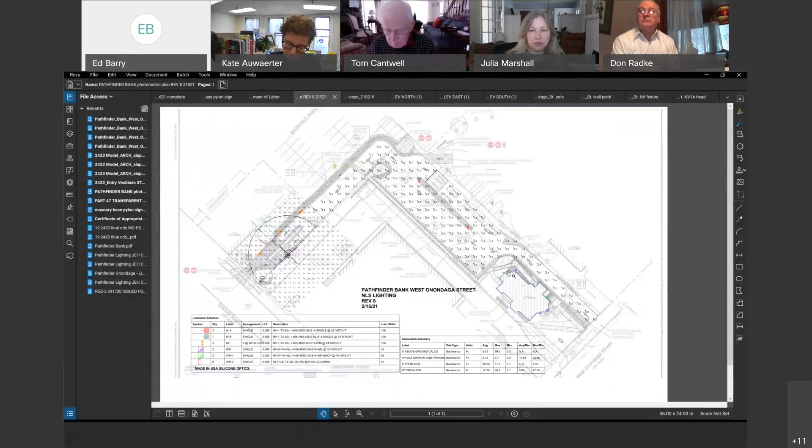Photometric plan. So we sent you a photometric plan, plus we sent what the site lighting fixtures are, the poles and the heads, and we also sent you the fixtures on the building proper. There's 5 locations of that, and then we actually sent some elevations on where the wall packs are going to go on the building. So this is the most recent photometric plan, and it has all the fixtures noted.

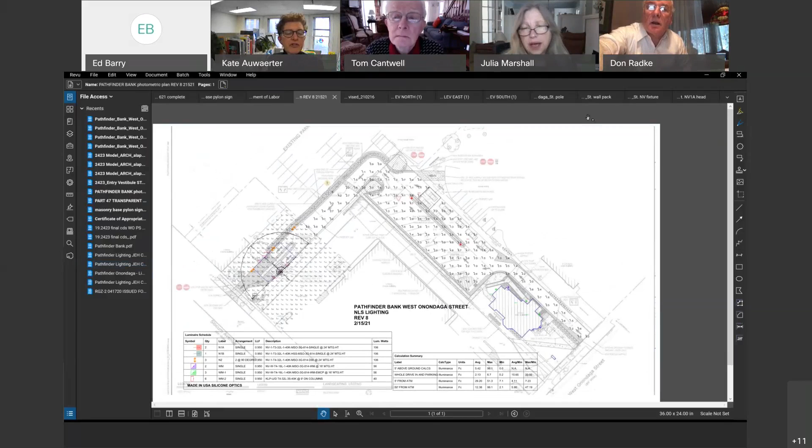I think I might have sent you the canopy lights too. So I don't know if we need to talk more about the photometric plan. I could get into the fixtures if you want, unless you have some comments on the photometric plan. We're good with that? Yeah, I would say - sorry, go ahead, Julia. I was going to say, I think you need to run through it for everybody in terms of what you're showing on the photometric plan so everybody understands the light spread.

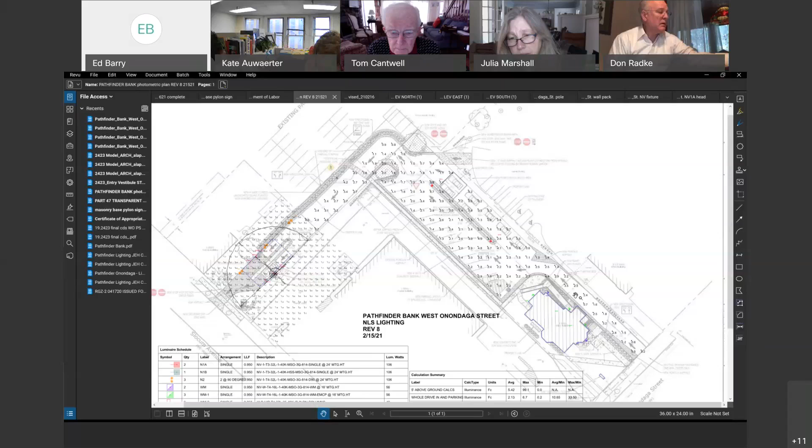Okay, well, the main building is right here as you come in, and so we have wall packs that are being located so that they show main lighting near the stairs and the ramp and all the exits. So it's mainly lit on the north, south, and the east. These are the lumens as you drive down the main. So the poles are located here and here. This is an island where there's a canopy that has the drive-through.

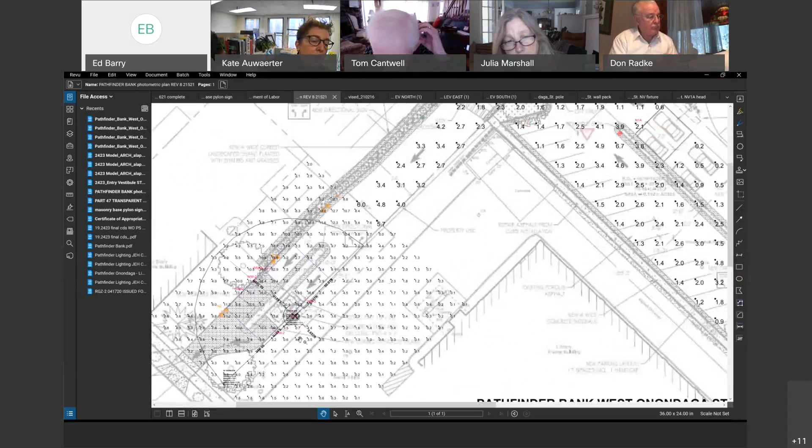So these are the lumens that are indicated. And then there's poles - let's see here. I think there's a couple poles back here where the ATM - this is the ATM. So this is the drive-through for the ATM. So there's 3 poles back here. And this ATM has its own light fixture too, lighting too, which is by code.

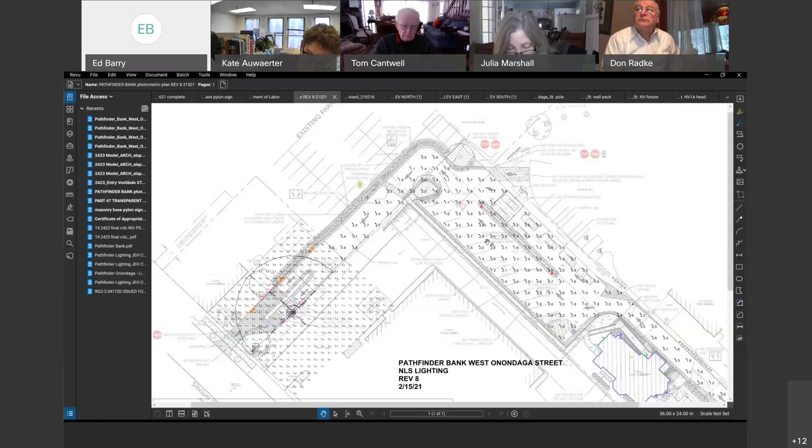All in all, we have 5 wall packs on the building. We have 2 poles, 20 foot high, on this little island over by the ATM - or I'm sorry, by the remote teller canopy. And then we have 3 poles in the back section where the drive-out and the ATM exist. And then these are the lumens that are shown. So you can see like at the edges, they're less, and they're more lit in the middle - you can see these 2.5 and 2.4.

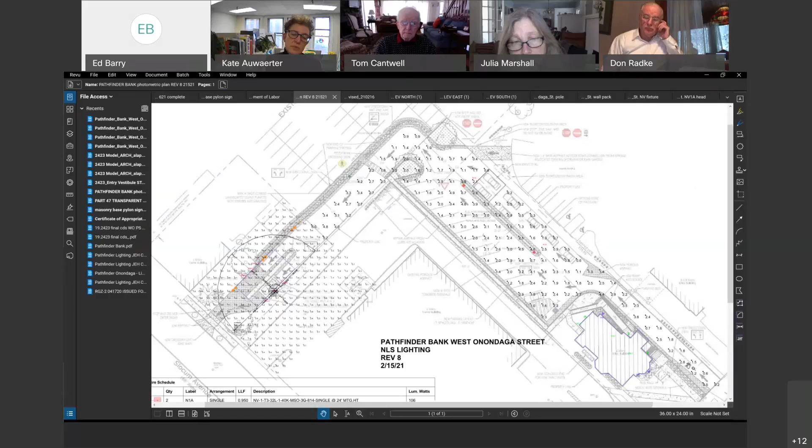This is better lit in the back here because of the ATM requirements. And so the average gets a little brighter towards the building, a little brighter in the middle, and the edges are pretty, a lot less at the neighborhood properties.

Hey Ed, can I add to that a little bit? Of course you can, yep, go ahead Terry. Okay, so I think you forgot to mention that there's the canopy puck lights on there, and I think there was another revision of the lights that had the photometrics of that, and I think that's what was submitted. Right, but still, it was still a minimal amount of light coming off those puck lights. Yeah, there wasn't a lot different change there in those lights. Yeah, and I think the plan that the board has does have those on there. That is the one.

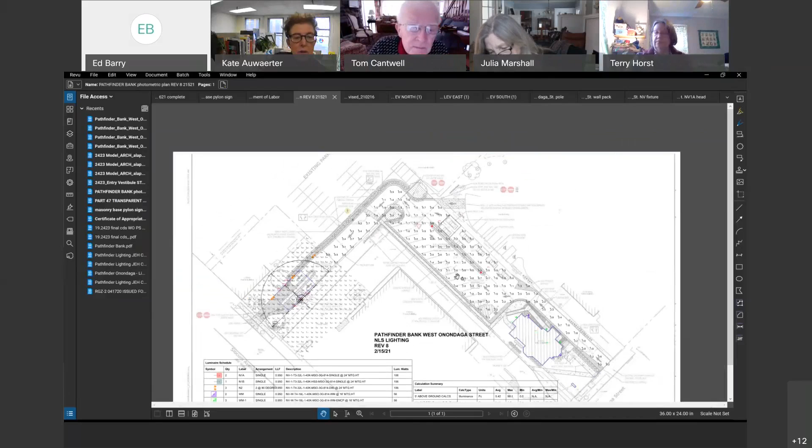Yeah, they're actually up-down lights, and we only had one in each pole, just to illuminate the canopy itself. So that's basically the overall lighting plan. I apologize if I didn't put the most recent one up here. It hasn't changed a lot, Ed.

metal finishes that you get, the bronze and the light bronze and all those. If we think we need a color, we could probably get a Kynar finish color, but we have not gotten to that detail yet. No, actually where I was going is not a color, but probably an aluminum, either bronze or, depending on whether it's a dark bronze, medium bronze.

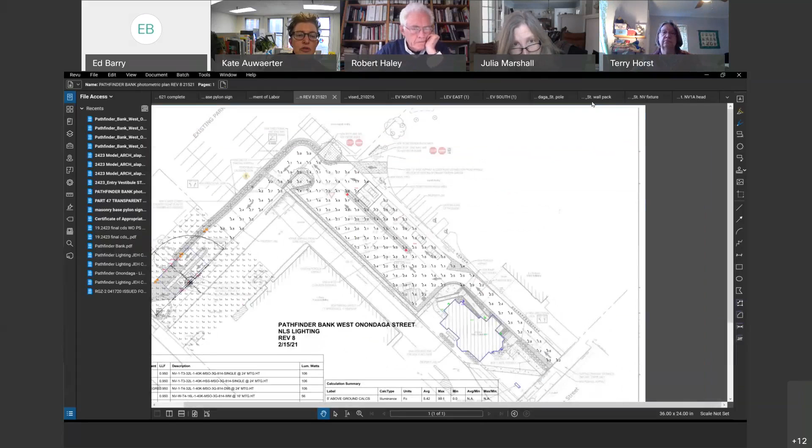I don't know, Kate, we need to see that, maybe if they provide you with a sample. Sure. Here's the wall pack. Can you see this now on the screen? Yes. Okay, so that's the unit we're getting in.

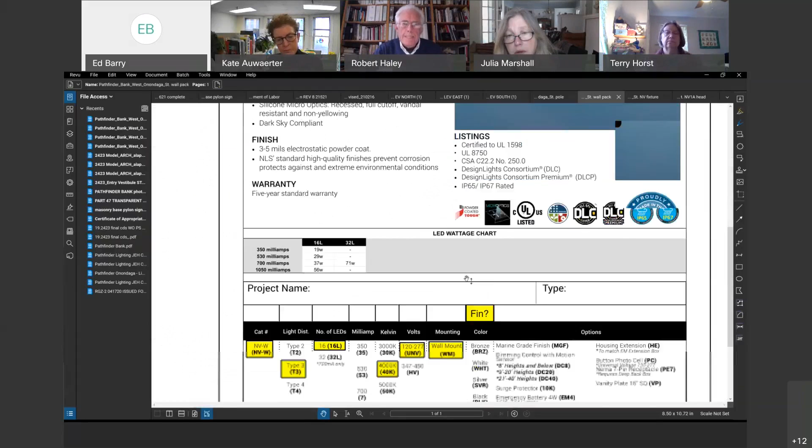That's the unit on the building. I thought the unit on the building was the smaller one, the K-lip, cut off wall pack. No, the K1. I'm sorry, the K1. Do I even have that? The K1 goes on the canopy. That's the canopy, the K1.

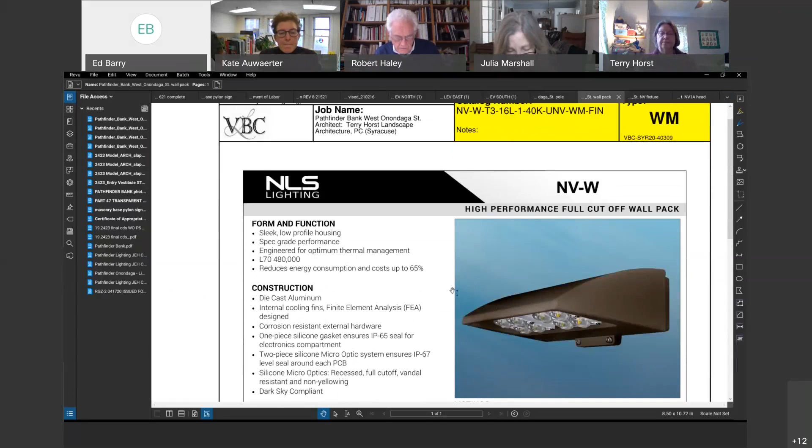Okay, right, that's the up-down one on the canopy. And these ones are the ones that will be going on the building. Exactly. Okay, so yeah, at some point we will have to pick it, we just haven't gotten there yet.

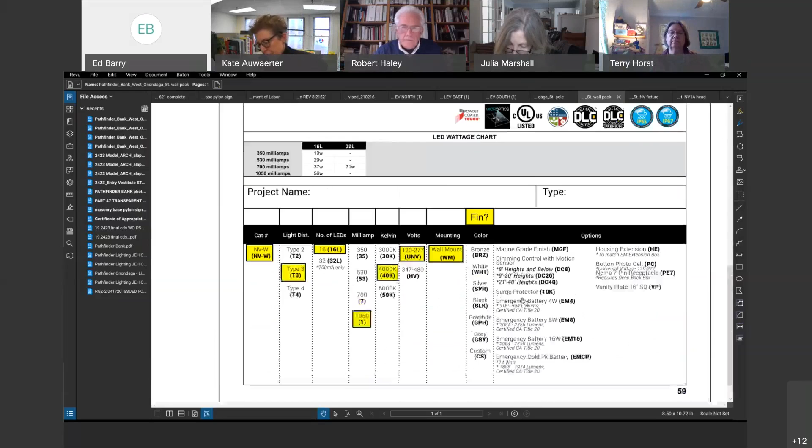If the board has a recommendation, go ahead and make the recommendation, as we know it's sort of a light tan color. What brick does the board think of? Blonde. What's on the screen?

Well, I would just comment that the board might recommend a dark bronze for fixtures, although we would leave it open to your judgment as a final application. Is that a fair statement from the board? In terms of the finish, I'm hearing a couple people say dark bronze seems to be just the color of the natural dark bronze metal finish.

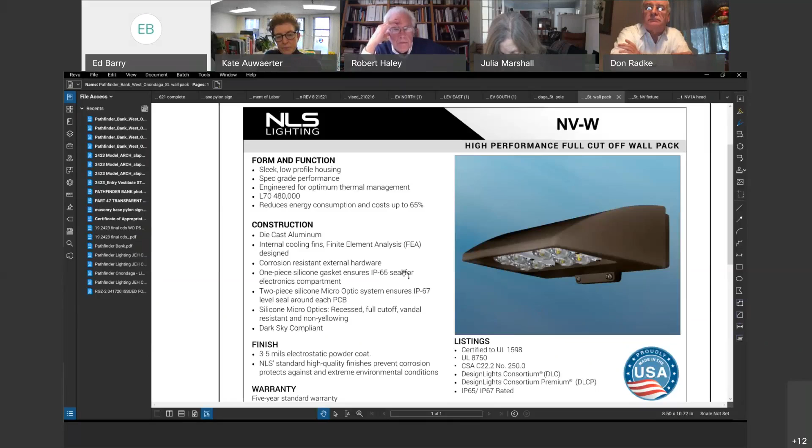I have no problem with dark bronze. That's probably appropriate for that area. Yeah, plus it won't stand out, it'll blend in. Their choices are bronze, white, silver, black, graphite, and gray, and I think bronze probably is the best choice if it's a light brick.

Usually a darker color subdues the object of the fixture against a historic building, so a dark color would be preferred. Dark bronze is probably the most typical, but it's your choice.

Another couple more questions, if I could. Your plan for the fixtures on the building, you said 5, and I see 2 on the plan, and the elevations don't have the light packs where they're shown on the plan. So is the plan incorrect at 2 wall packs, or am I missing something? I see 3 maybe, let me see if I can.

Well, I guess just as I look at the plan, the wall packs are kind of all over the plan. Are you looking at the photometric plan, or which plan were you referring to? It's the photometric plan. It's a little inaccurate because that was done before we really looked at it

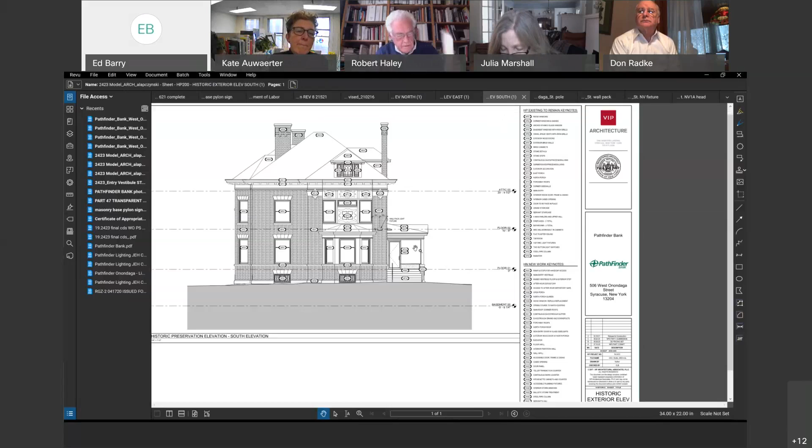as far as trying to get it nailed down to the exact locations. So if we revert to, let's look at the elevations instead, I think even better. So right now I have the south elevation. We took a look at it height-wise, and where it has an optimum, close to optimum light, and tried to put it so that it works with the building too. So we put it around 14 feet off grade, and here's the first one, looking from the street at the building.

We got one on this corner here, and as you walk up the stairs, there's one on the other side, which would be the east elevation. So for the east elevation, we have 3 - one on this corner, one over here, and one here, and we split them between the floor windows. This is to illuminate the walkway, the stairs up, and the ramp.

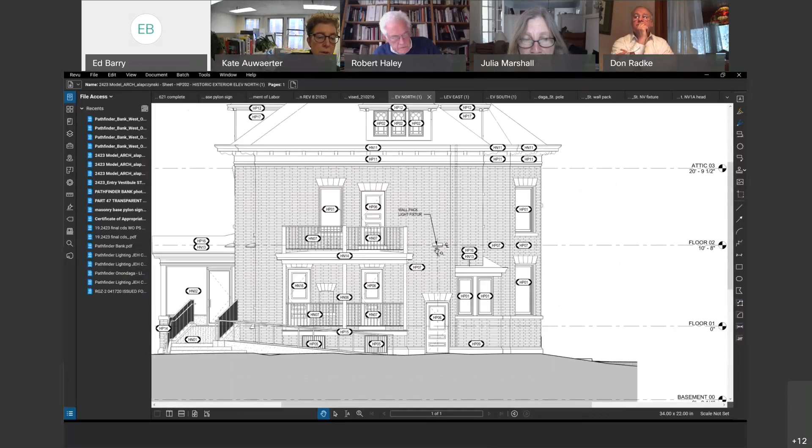And then on the north elevation, we also put one over the back door, at the same height. So we try to keep them uniform in height, and we tried to find a place that was consistent. So that's how we located it now. We took some time looking at it.

Is there anything on the west elevation? Wait, I want to finish my question. Did you address it exactly? I had looked at the elevations and found, I think, 5 fixtures, and I didn't see that on the plan, so I just wanted to make sure.

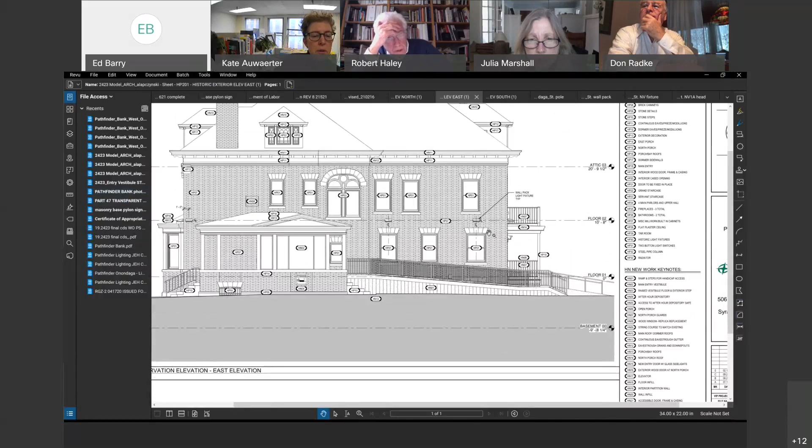Secondly, my recommendation is that you might drop the datum or the height of that to align with the roof edge, down about 1 foot. What I'm suggesting is that if you line them all down with the roof edge around the building, it accepts one of the datums of the historic porches as the height for all the light packs.

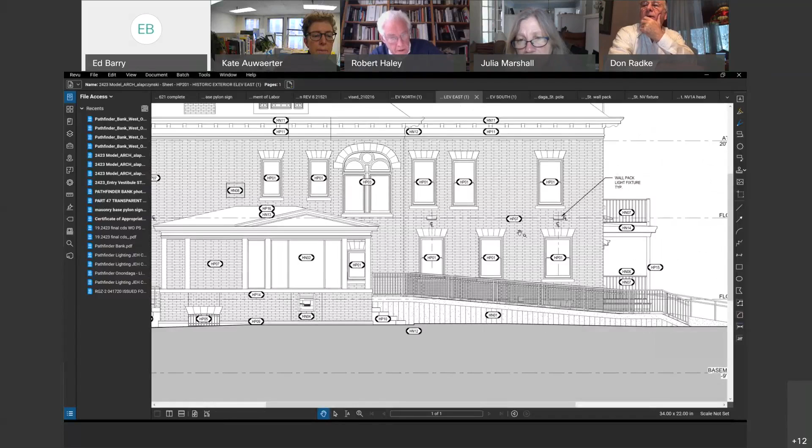Well, we did look at that. The problem is it starts to get into the stonework if you put it in this location. No, it's not, it's top of stonework, but I appreciate your point. I think you're fine here, but that's a slight articulation - if it's possible, please consider that. Well, I guess you wouldn't want it on the stone.

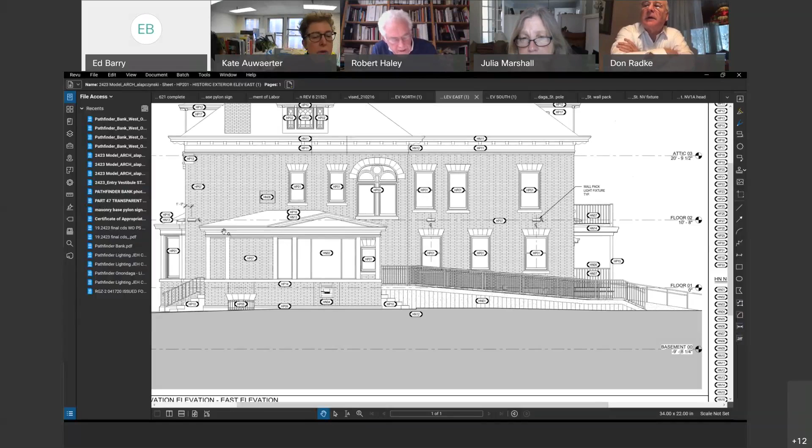No, no, we could drop it lower. Well, the roof line, I don't believe, is in line with the stone if you take the exact measurement. Yeah, it's close. I've looked at it. So we could, I mean, we could.

I'm not telling you what to do, I'm asking you to be sensitive. That's fine, just take a look at it, lower it to the point that you think is feasible, and that'll be fine. Do you have any light packs on the west elevation?

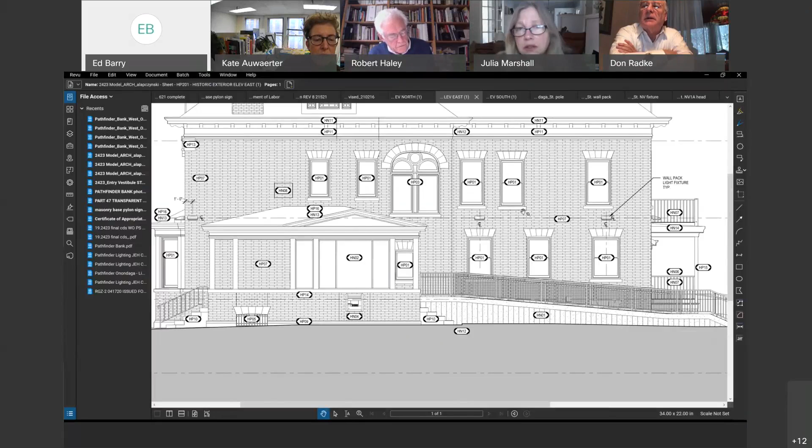No, we don't. May I just say - I agree with Bob, the only reason it looks a little odd is because it's equidistant from the upper sill and the keystone, so if you just bring it down a little bit, not necessarily aligning with that eave, I think it would help.

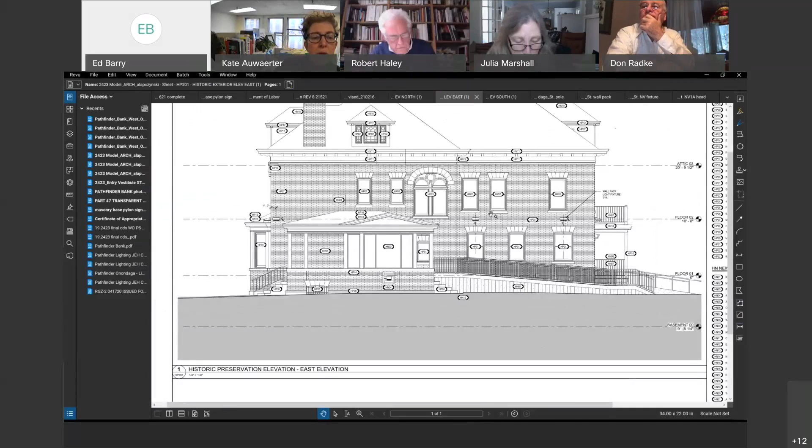But I'll leave it to you. I'm just going to ask, and maybe it's rhetorical, are the packs drawn to size on the elevation? Just because there's nothing written. Yes, and they look fine actually, we took them off the web, and they're as close as we could get it.

Yeah, one of the things that's so difficult with these light packs is that one of them, like on that front elevation, the south elevation, that light is so close to the bay window that it's going to blow out the light on the bay window. So you're trying to locate these items to not accentuate in a negative way the building.

And it's a delicate balance. I appreciate what you've done here, I'm not speaking against it. I think it's just slightly further articulation - if you could consider it, that's all.

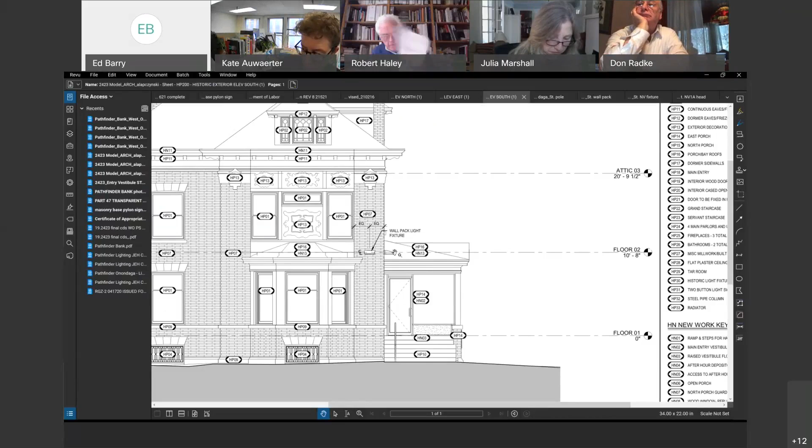Yeah, we actually did look at it like that, and if we lowered it here a little bit, we were kind of running out of space. So we were looking at that with that in mind, and we'll look at it again. Thank you, okay, sounds good.

Want to go on to the changes? I didn't see the sign on the lighting plan - is that sign on your lighting plan up close to the sidewalk? Let's wait on the sign, Bob. Let's go in a different order.

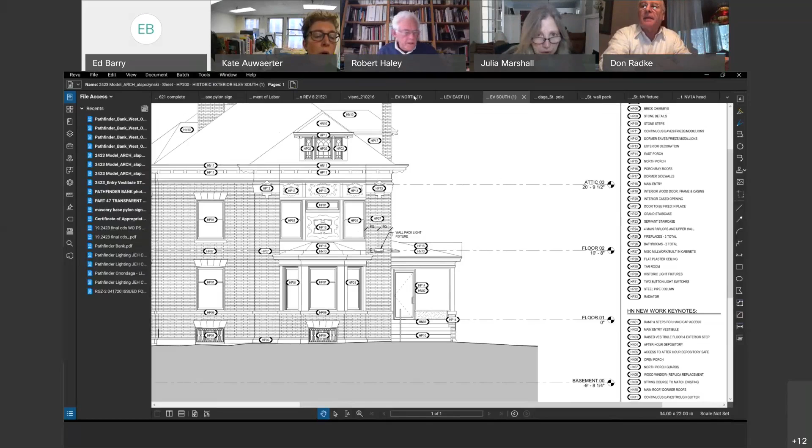Let's go ahead with the changes that you made, I believe, to the west elevation, or was that the north elevation, and the glass work? The east elevation. Okay, one second, I gotta find that. You mean the porch, or the entry glazing enclosure, the entryway? Right, yep, right.

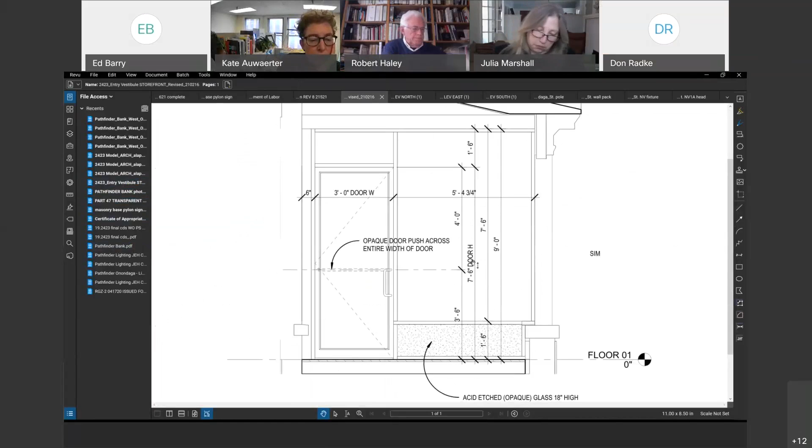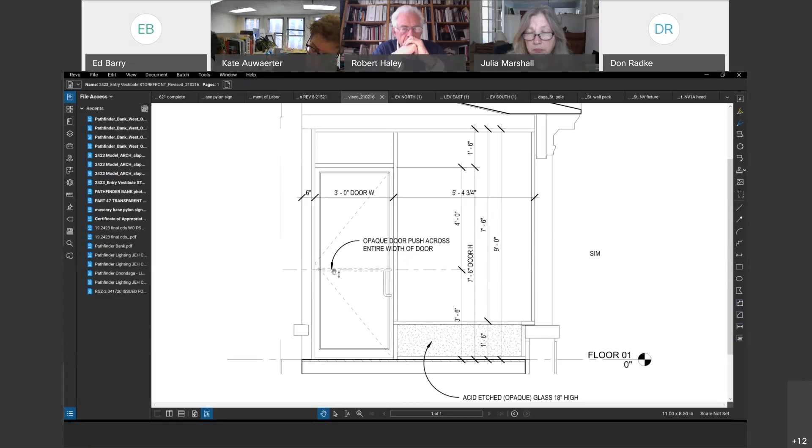Okay, so this is what we did in response to having the glass be all glass. We looked at the code and tried very carefully to keep as much glass as we could. So we decided we would take the horizontal aluminum frame across and put an opaque etched glass at the panel here, and then for the door itself we're going to have a push bar, and we feel that meets the intent of the code. So this is how we're responding to meeting the code for the glass, while trying to still keep the historic fabric intact. We hope everyone would agree to that.

Any questions on that? I think it's the right response. Did the code require 1.6? I'm just curious. I have the code, I don't know if I want to get into it. That's okay, as long as you're complying, that's fine. Yeah, we are in compliance with the square footage of it.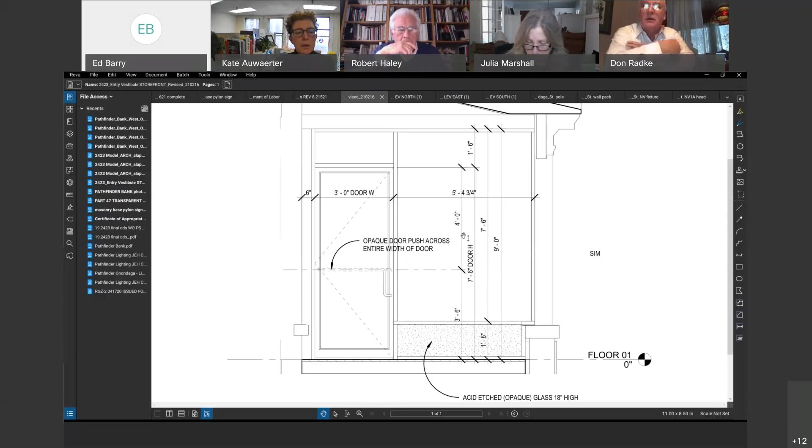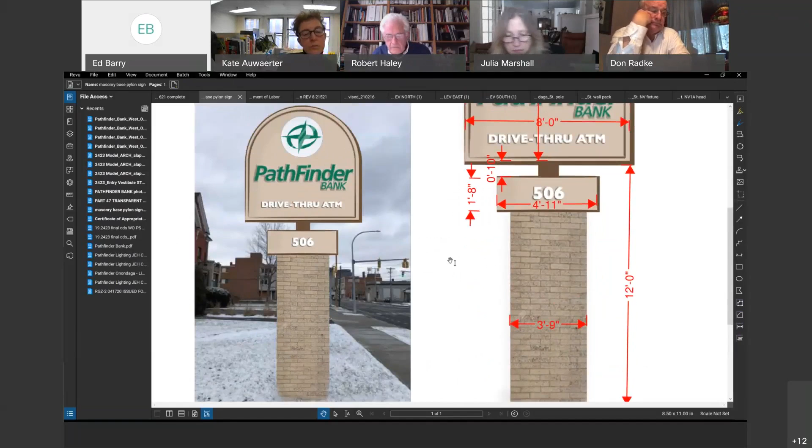Okay, let's move on to the sign. So this is the sign that we would propose we would want to go with. I know there was a comment or two for it and a comment or two for the pole itself, but talking with Pathfinder and a lot of us, we believe this is the way we'd like to move forward with, and this is where we're at right now.

And this is what we'd like to get approved. Okay, what's the lighting on the sign? It's a lit sign inside, interior light. So what lights up on the sign, the lettering or the background? Well, I'm not exactly sure how they light the inside of it, I could get you more information. We haven't gotten to the design internals yet, we just know it's a double-sided lit sign.

Are both the upper and lower portions of the sign lit? Yes. So the street number is lit as well as the Pathfinder name? That's correct, at least that's what we're proposing. Any comments on the sign?

Ed, the only comment I had is the overall height is 18 feet, and in that location that seems high. I don't know what other board members feel. I don't know if I can get to it, but there's a Walgreens right next to it, and across the street there are some very large signs right next to us.

We know that, yeah, I don't think we're even close to some of the heights of our adjoining neighbors. It's actually taller than that. If the bottom is 12 feet plus 8, so it's 20 feet total. Yeah, it's 20 feet total, we could take that into account.

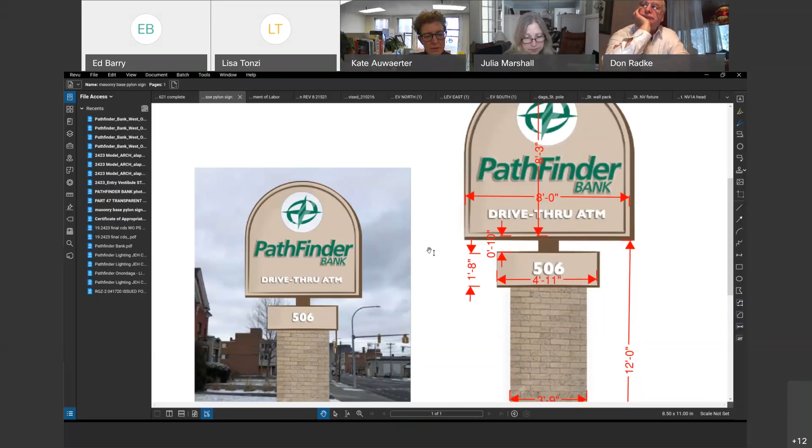Well, I know the historic people don't want you to try to go historic as far as matching a certain style. As far as doing an old style type to try to make it look like it was on the building originally, we want you to do something that doesn't react to that. It wants to be that you can tell it's not historic.

Who is that? Can someone else chime in on that? I'm not sure I understand what he's saying. They don't want to mimic because they want the historic building to stand on its own.

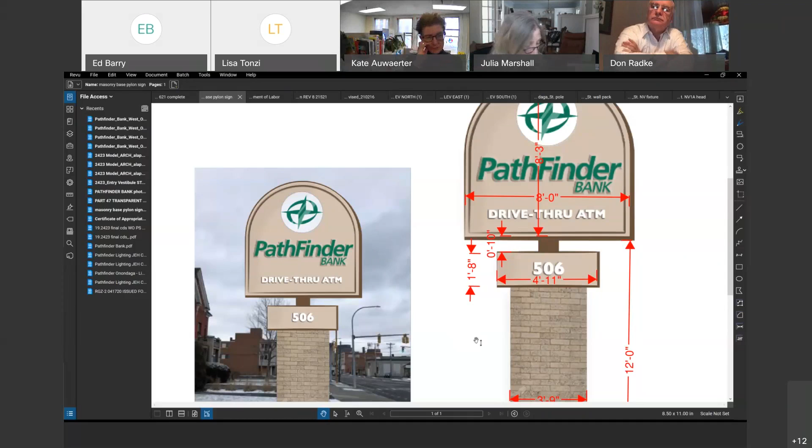But as far as the sign is concerned, it's not pedestrian friendly, and since it's going to be lit on both sides, I think it's uncomfortably large. I think a simpler sign would be more appropriate. I'm uncomfortable with the shape of it and the scale of it.

Let's get some other comments from board members, please. Thank you for listening to some comments from the previous meeting where we have more of a vertical orientation.

I appreciate that, but if we could scale this back like a quarter or a third of its size, I think we'd start to see what Julia is saying about more pedestrian scale, pedestrian friendly opportunity here, because we have quite a large column of brick and signage.

And if we reduced it 25, 30%, I think we start to reach our pedestrian scale, and it would look more in tune with the residential structure that this is sitting in front of. Even though it's a commercial building now, it's a residential piece of architecture, so I think that's getting lost in the translation here.

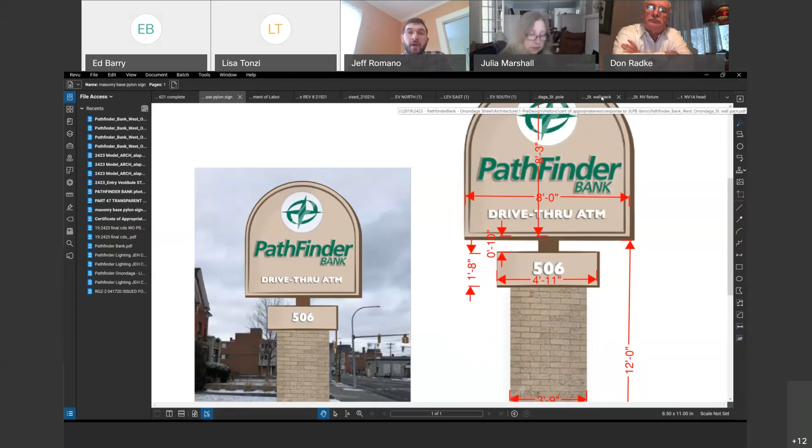But I do appreciate the vertical orientation of the sign, and I'm venturing my guess that the brick would replicate what's on the building. Ed, if you can clarify that.

We will have to take into account the texture and the tone of the brick, and we'll probably try to do something close to it. Yes.

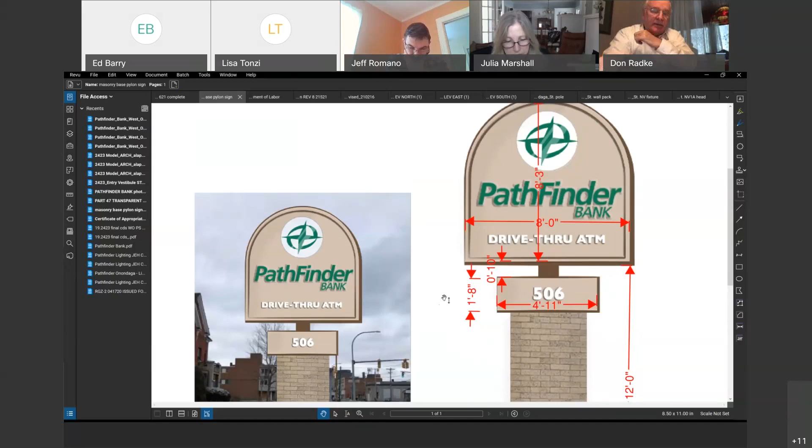Thank you. And if you could go back to your client and talk about the scale of the sign, both the height and the actual size of the sign itself, the 8x8 sign. The comments seem to be pretty across the board to see what we can do about reducing the overall size and scale.

Okay, get back to your client then. I don't think that's an issue. I'm sure we could work with that, and maybe reduce the width of the masonry too.

So we'll take a look at it and we'll scale it back. And I'll talk to Jim. I don't know if Jim's online with us right now today or not. Jim Dowd.

I don't see him. Okay, I will talk to Jim. We'll take these comments into account and we'll send a revised something out unofficially back to you at some point.

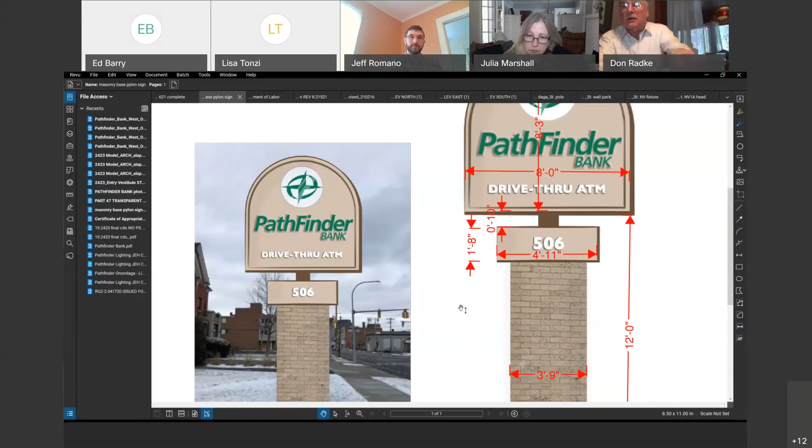Terrific. If I could just jump in, I think we should establish that the maximum height for the bottom of the Pathfinder sign should be 8 feet. In this kind of a location, I don't see any reason to be any higher than 8 feet. That would be above vehicle height.

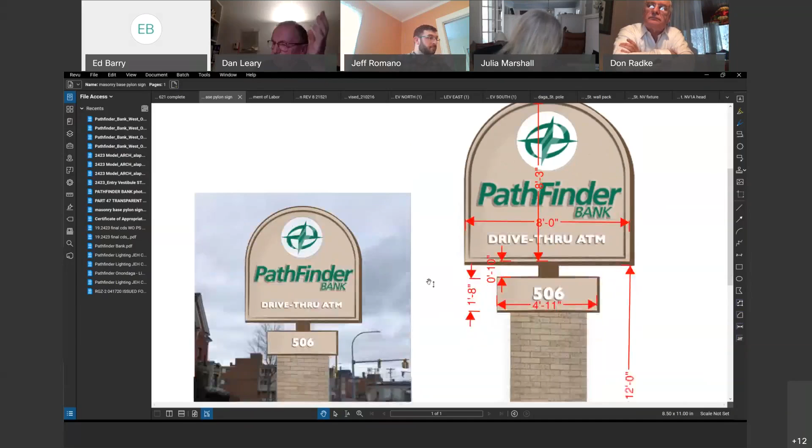I question the need for the cap on the top of the brick wall with the illuminated 506. The 506 might be larger numbers, but I don't see any reason to illuminate them. Other than that, I agree with the rest of the comments.

Okay, so add that to your list. Well, we were using the existing pole that's there. It's 12 foot high. Otherwise we'd have to modify the pole, which I guess we could, but that was why we started with 12 feet. That's an existing pole structure that's sitting there now.

Right, and we were just going to utilize the sign pole that we have. Okay, well that's why you should take a look back at it again, and get back to us with the comments.

And I echo what Jeff said, so much for listening to the comments and at least going in directions that we can all live with. So that's very good.

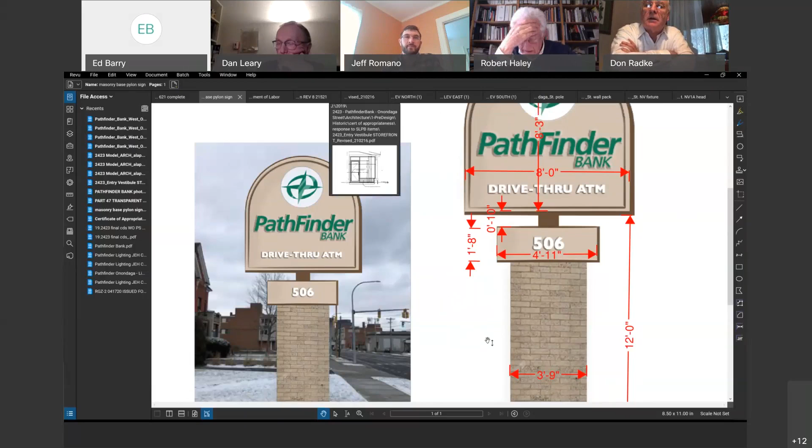Mr. Chairman, any other questions? Yes, I have another question, if I could ask it. Sure, go ahead. Very simply, I wonder, Ed and Terry, if you could outline for us what are the existing signage requirements in that area for this sign?

150 square foot is our building, our site we have right now. Terry might know the overall, but I know that she did the numbers, and we're well within our 150 square foot.

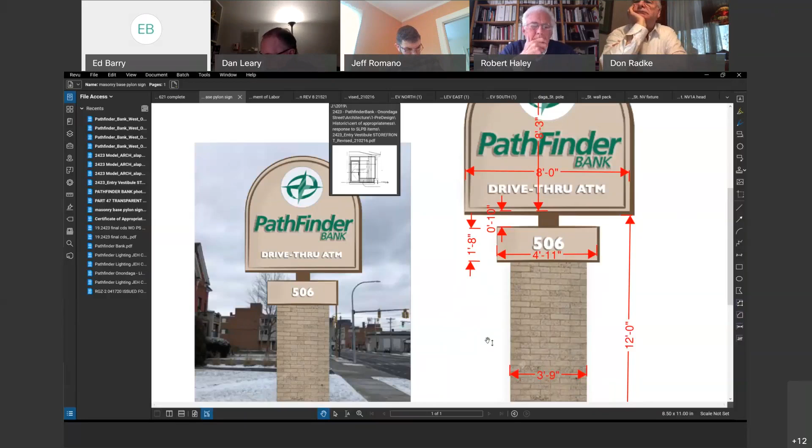What about the size and location requirements for signage along the street here? Terry, maybe you could talk about that. I'd have to go back, I don't know off the top of my head. What I'm trying to say is that we do have some standards in place.

If it is 150 square feet, your 8 by 8 is more than that. That's 64, times 2, that's 128. I don't know if they're going to count the lit address.

My point here is that the overall condition of signage, we need to know what the basis is to judge this one from, in terms of variances, either location or material. I agree, I hate to go down the line and try to make this submission appropriate by little tweaks. I'd rather know what the requirements are for the building's signage and then have you respond to that.

I think we're not looking to compete with other buildings commercially, and I know your bank would be. Appreciate that from your client. The comments were quite simple, oversight.

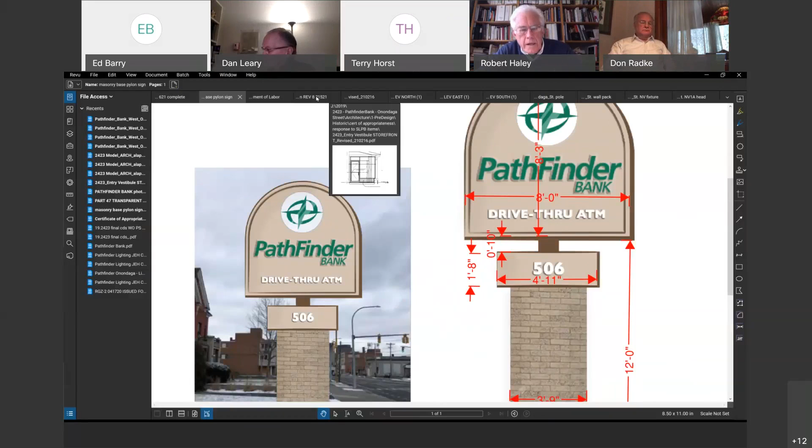First of all, it's a completely new submission. I appreciate now your earlier submissions of simplicity, both in size and in the simplicity of the sign. I think the comment was made about the scale.

This is 12 feet high, that's 2 6-foot people. So it's definitely a road sign as opposed to a pedestrian scale sign, which is a negative on this street. I think all of that comes to bear that this is a classic case of commercial signage that we're trying to get right for the historic context, both of the street and of the building.

So I would like to know first the requirements for signage, so that we know what variances might be needed here, then we're trying to judge it in context to the building's scale. In addition, the question of the logo on the drive-through teller canopy.

I don't know if it's part of the signage. Exactly, in fact, the whole teller canopy is a sign in itself, as you know, the arcing form, the signage on both sides. And I presume there'll be some signage over on the exit teller as well, so that's all part of your total signage submission here.

The sign's big, it's enormous. It doesn't have a design aesthetic to the building, except for the brick, which now I'm becoming more in favor of. But simplicity, your client's name, certainly the critical identification of the street number.

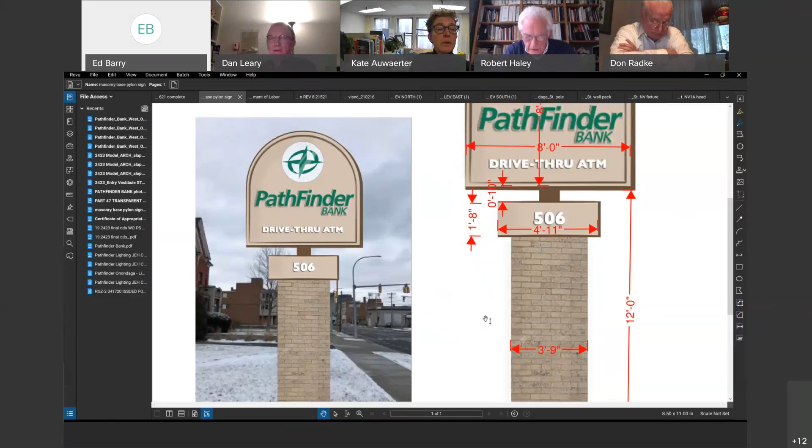The only comment on the vestibule is that the changes on the vestibule are really quite excellent. I'm glad that you, Ed, and your architectural team here were supported by this board to do what Albany was asking you to do there. The new detail of the raised 18-inch base aligning with the existing stone cap is a very appropriate detail both for code and for this building's design.

I think what's remaining here, only Kate, to answer your questions, is the detail of that metal vestibule engaging the columns. That's not shown in these documents. In other words, a plan showing how the vestibule walls, those 3 glass walls, are built to the stone cap, the existing stone cap of that wall.

Yeah, you lost me. The detail is going to just wrap around it. We don't have a particular blow-up detail, so to speak, at least at this point. Let me ask you a question then.

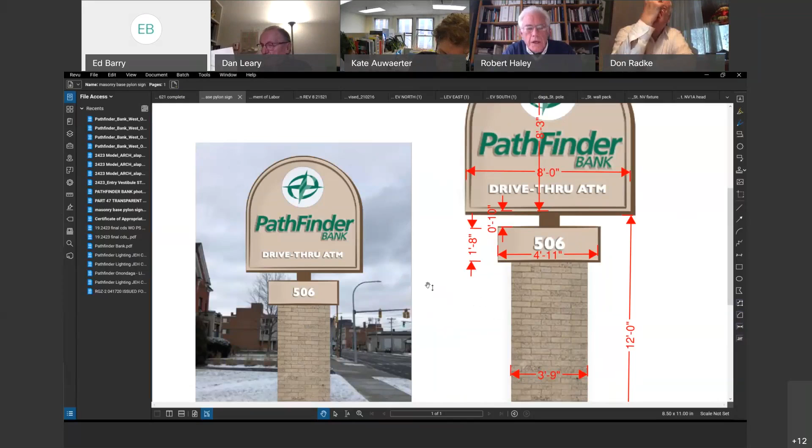The glass wall, the eastern glass wall, where is its location relative to the stone cap? I'm talking about the plan here. Where is the glass in plan? Is it out with the face of the column, or is it back at the inside? I'd have to get to the plan, I don't have that memorized.

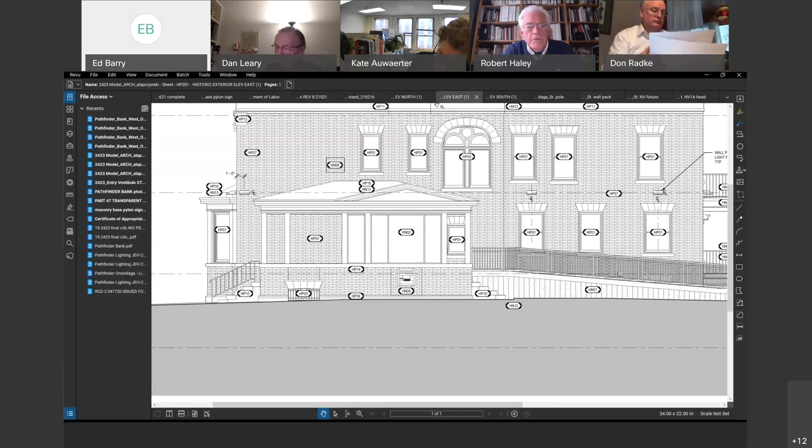No, that's okay. My point is that the company was pushing you in one direction, and your instincts were right, which is to make the vestibule a subset inside the brick wall base and the colonnade. So it's critical where that eastern glass wall is relative to those columns, in terms of rendering that concept clearly and historically accurate.

Yeah, we'll definitely take that into account, and I'll look at it in the floor plan myself, just to make sure we're okay with it. It was on the historical plan, I believe, like that.

Okay, I understand all your comments on the sign, and I'll get back to Pathfinder. I think the first thing we'll do is look at the overall size, and reducing it by 20-25% might solve most of the problems with the amount of signage we can have and the scale. Maybe we take the 506 address and put it in the body of the sign. We'll take a look at it.

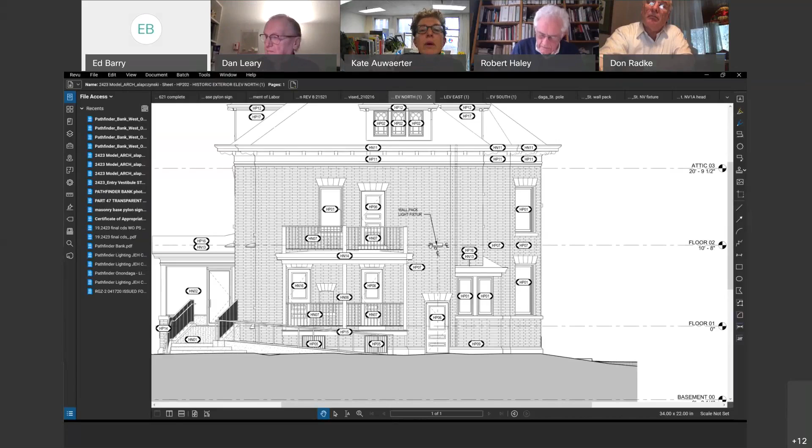Okay, that sounds good. And yes, I think we should also note, Don, that the lighting plan does not include the wall packs, as far as I can see, in the foot candle projections. It's not really critical anywhere except around the front entrance and the stairways. It would be inadequate the way it's shown, but I think if you added the wall packs, it's okay.

Yeah, if you could identify those on your scheme, as you said it wasn't 100% accurate. If you could update that. I think the only thing that wasn't accurate was the canopy fixtures. I believe it shows the wall packs on the lighting plan. Let me go find it here.

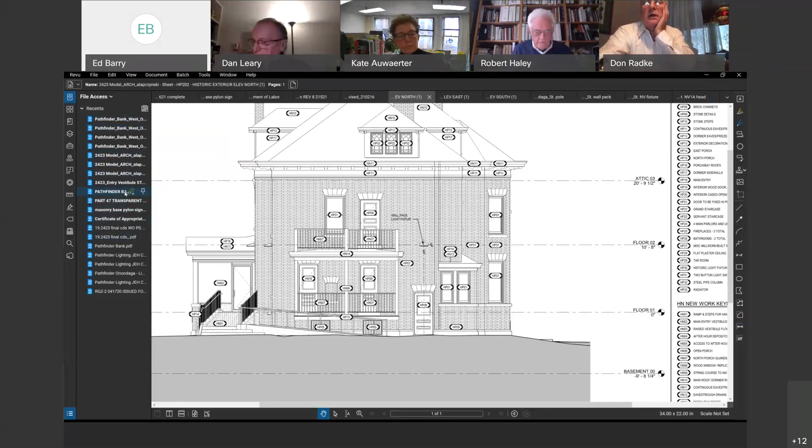Well, the foot candle registrations are not. Yeah, they're right here - wall pack, wall pack, wall pack. They're just not exactly shown in the location. We changed it; this was done before we started to look at the elevation of it, and it really doesn't affect the illumination, but we can have it modified exactly.

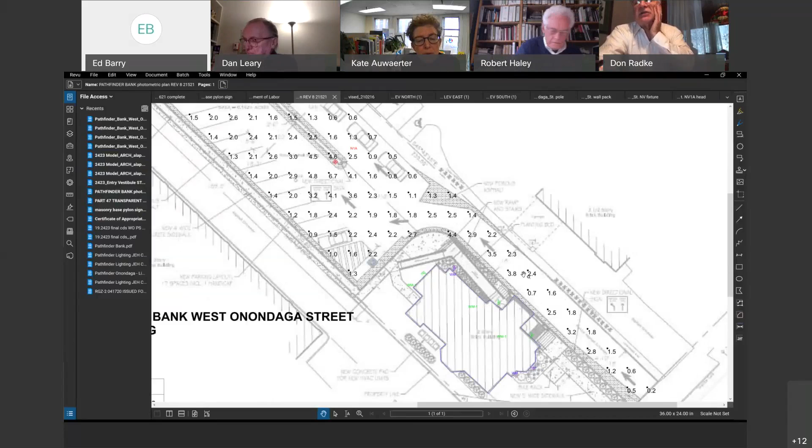Yeah, just make a note so we have it correct. Okay, and then we appreciate you going back, and we have another meeting the third Thursday of the month, and hopefully we can wrap this up for you at that time.

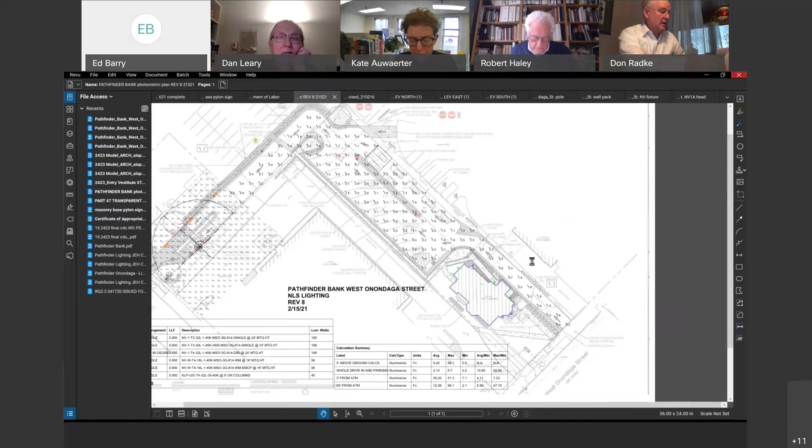Oh yeah, actually, I will start to share, shall I? This is our jurisdiction here as comment, correct? That's correct.

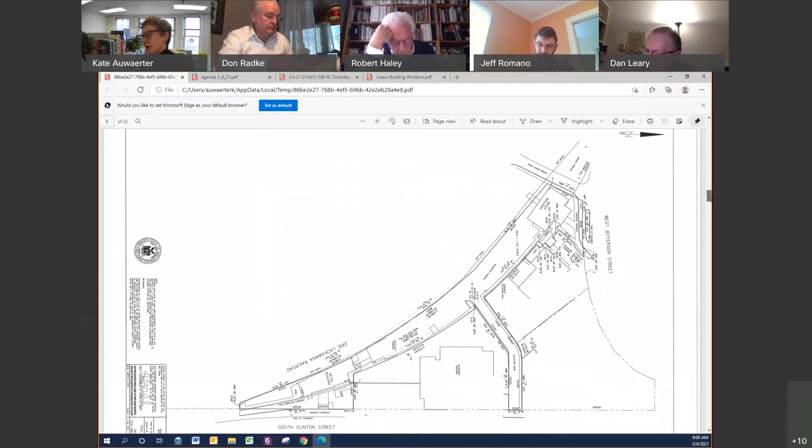The building - if you know about this - well, it's not so much a building as a structure. Down in Armory Square, off West Jefferson Street, it's behind or close to the old railroad depot, and it's actually here. I'll see if I can get in here for you.

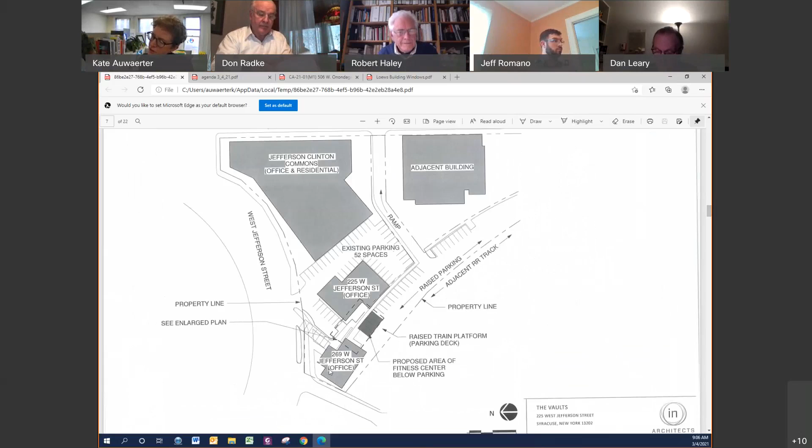So let's see if I can describe this here. They have built - this is existing already too. Hold on, I'm going to go down here. Hold on, let me see. I'm going to go down to photographs.

Okay, so do people - actually I should start - do people know where we are in Armory Square? Okay, yeah. And what has been done is there are these spaces within this embankment. It's basically the railroad embankment, although right here I understand there's actually parking up here. Within this concrete embankment, they have carved out spaces.

There's one that's being used as an office, and now this one is going to be used - hold on, I can get in here - as an exercise room, yeah. The windows - so here's one already. It's actually a really small project.

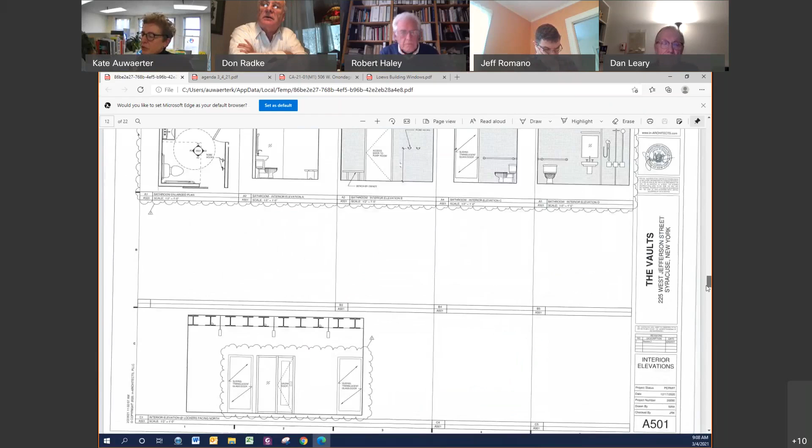These openings already exist, and there's just space behind this concrete wall that they're turning into the vaults. And they want to put aluminum, the sort of storefront windows in aluminum frames, into these openings. So they're not actually new openings, they are new aluminum windows, as he indicates here, but the openings already exist.

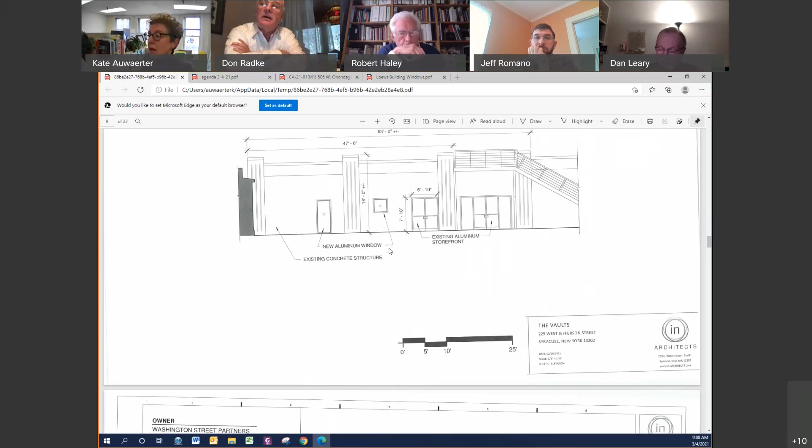They're just updating. Existing, there are aluminum already. And this is down, I'm not actually sure what it looks like at the moment, they are filled with...

At the moment, let's see here, I think there was one photograph. Well, you can see that one there. I don't even know what they're... yeah, at the moment it's just plywood.

It appears to be existing. Right, so what we're seeing is aluminum, actually the steel lintel. Right, and it's very odd.

The location is not one that's very visible at all, and as long as what they add matches in color the best that they can, I think that's the only issue I would have. That's their plan, to basically match the same kind of aluminum storefront as is here on these doors.

Kate, do we know if they're just wanting to add the 2 new, or are they replacing all 4 openings? Do you know? No, only the 2 new. Okay, just the 2 new, I don't see that here, but thank you if that's the case. Yep, those are the 2, the other ones are just existing.

Any other comments? Nope, just match is appropriate. Okay, yeah, so the comment is in the affirmative as long as they do their best to match the existing. Okay, good, thanks, thank you very much.

Yeah, sorry, I was sort of stumbling to describe. Moving on to the discussion on the Loews building and window.

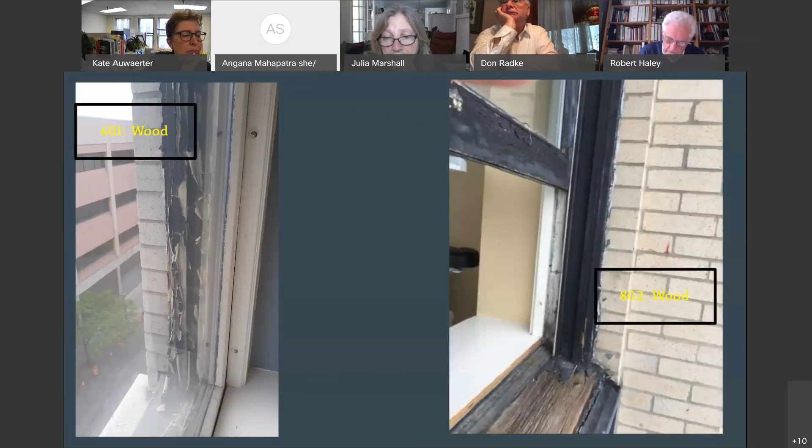So the exterior wood you can see on the left, that's actually my own unit. On the right, a couple of floors above, someone literally had to stick their camera out the window and took this picture recently. This is the same unit two above, with broken latches. Can't see here, but the seals are broken, and there are some significant safety concerns, as you can imagine.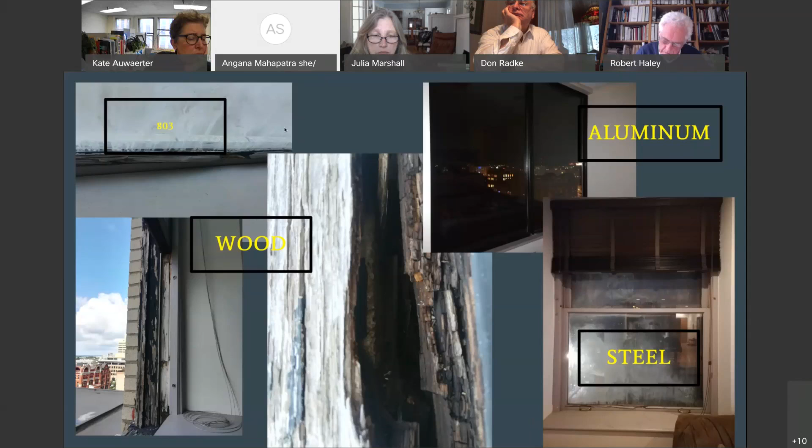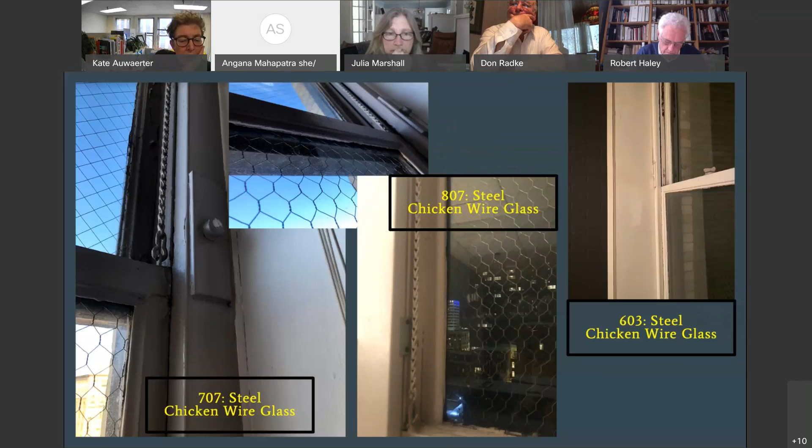Okay, so far in the process we have come to two companies who have been actually willing to work with us because of the scope and nature of the project. Flower City is one that we've been talking with.

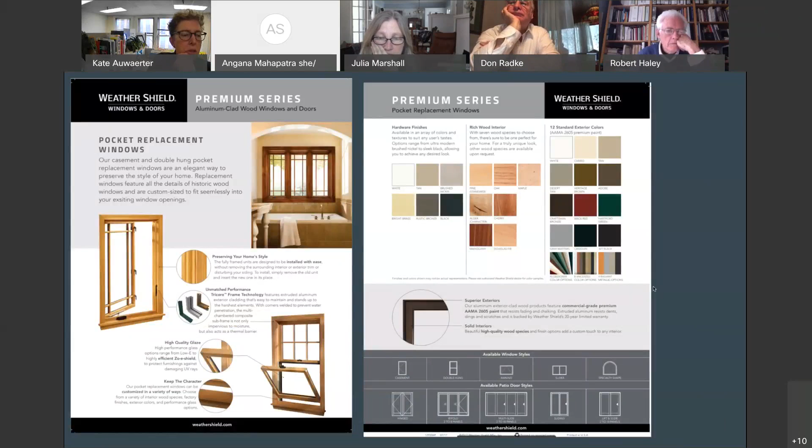So coming to and considering all of that, we want to thank you for your guidance in choosing the windows. First, the condition of these windows is so poor that our priority is to address the safety concern, because in this building we have several small children, pets, and older adults who live here. A few of our owners rent out their units, so tenant safety is a concern. Second, we have to make the building more sustainable in terms of its energy use.

The poor insulation capacity leads to high energy use and increased operation costs, and would, we think, hold back Armory Square, the downtown area, because of the city's goals of advancing environmental sustainability, and we do not want to be part of holding that back.

Many of us choose to live in this building exactly because of its historical qualities, so we do want to maintain the exterior appearance and consistency throughout the building. A couple of questions we had: how we would incorporate screens, and how that would affect the exterior appearance if it does. One thought was to maintain the exterior color being black.